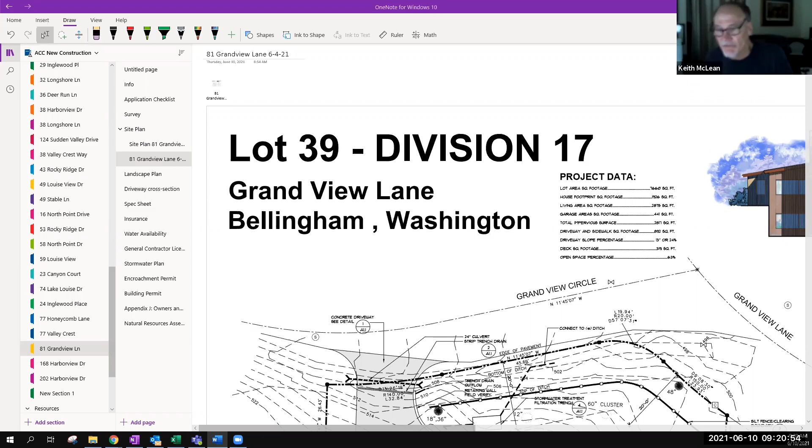Can I have a quick question on that? Joel, why are we showing a 7-foot setback on there instead of our normal 5-foot setback on the plan? Yeah, I don't know. This was a request I made for the builder to show a 5-foot setback to the eave projections. I don't know why they're going 7 feet all the way, providing that, but it's greater than the 5 foot. I'm satisfied with it.

Yeah, with a 1-foot eave, it'd probably actually be 6 foot. It looks like they're going to the corner of the house. There's a hash mark right there for the 1-foot eave, just below the 7 foot. So you can figure out that it meets the requirement—in fact, the 5 foot is to the eave, so they have an extra foot, it looks like. I think we have a similar situation, we're at 7 foot here. Just not used to seeing someone give extra feet. Extra's good.

Part of the reason on this one was the house lays out better into the other corner, away from that corner where there's 7 feet on both sides. So the goal was to get it further into the property that direction, instead of all the way up against the setback line.

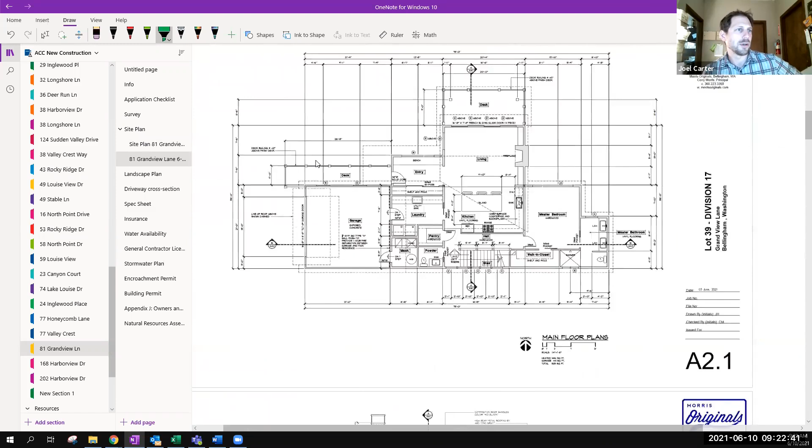No, I don't have any issues with it. Next up, elevations do not specifically show height to finish grade. Yeah, we don't have that. I don't think it was requested to provide a dimension showing our height out. We are well within the height requirements, looking at under definition 2, the 20 feet to the rear of the home. We've got our height of our main floor, but not to our finished grade.

But looking at the height of, where is it, the height of the building? Where do I have it here? I thought we had a dimension. It was measured. Here's what, so our top of our ridge is at, show up here... 539. How'd you do that, Joel? Clean it up from the blurry to where it got real clear there. You just need to zoom in and then give it a few seconds and it should sharpen up. Yeah, I just zoom in and then wait, and it pops into place.

So we're at 530. Quick question, does the maximum height go to the ridge or does that include the chimney enclosure? Our language doesn't say anything about a chimney enclosure, it says top of the roof line. Correct, but which is fine. I believe even with the chimney enclosure, we are there.

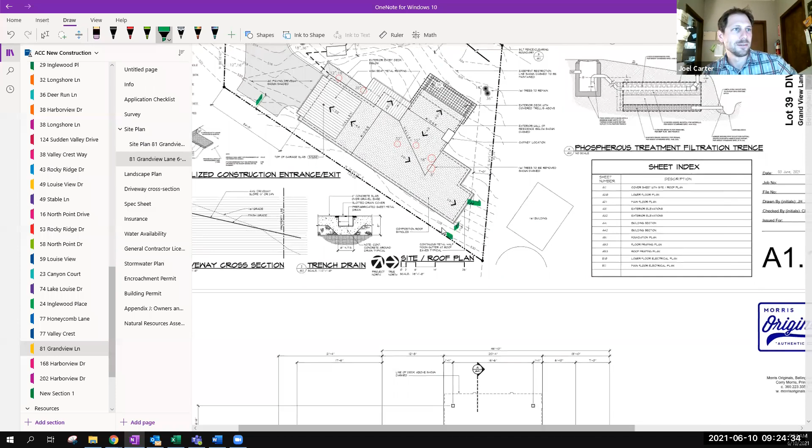If our top of the ridge is 539, and if we're measuring to the back of the property line here to about the 530, you can see we're right there. We're only, what did I say, 529 to 530? Sorry, 539 to 530, we're only, that's a difference of 9 feet.

And this does bring into, so we can also add the chimney, the 4 foot chimney, and we're safe there as well. I think the ridge line's appropriate. The chimney is just a small piece. Yeah, I don't think we've been including chimneys. And we'll make sure we have a spark arrestor up on that chimney. Yeah, for sure.

Okay, what's next? Propane or natural gas? I think we were going to do all electric. Is that correct, Adam? Well, there is natural gas in the road. Getting exact locates is next phase, as we call for locates to get the dirt work started. So exactly where that comes in is not known by Water District 10, that's something we've got to just find out.

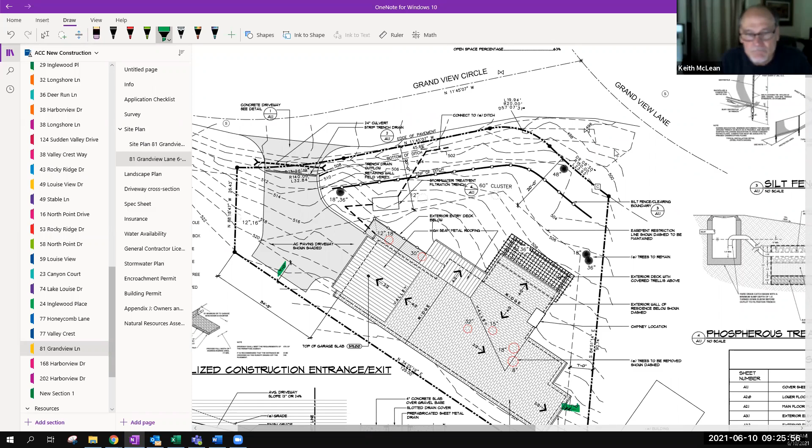Next comment here: maximum of 352 square feet of landscaping allowed. Yep, so we had this conversation after the original landscaping plan was submitted. Here's our most recent updated landscaping plan. These green circles were not labeled as lawn or grass. I think we've got in here now, they made this comment: lawn area not to exceed 350 square feet for the stormwater report. But if the stormwater report says 352, then it should be 352.

I ran that image last night late, so it's probably the one that's there, and I came up with that image showing it closer to 586 square feet. So you might want to adjust that, show the actual size. We had the actual size that came up after their original landscaping plan was submitted, and it hasn't deviated from our site plan view here. So they've put that note in there. Certainly something we'll be checking on our inspections.

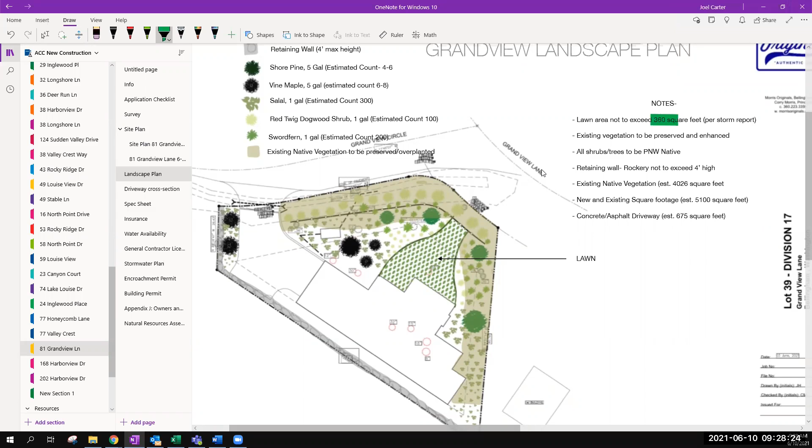All right, landscaping, yeah, square footage.

Next up, are the lighting fixtures capped on top? I believe they were. Yeah, they are. I mean, first off, they would be exterior grade or exterior designed, but I imagine those are capped, yes. That looks cool, I like that.

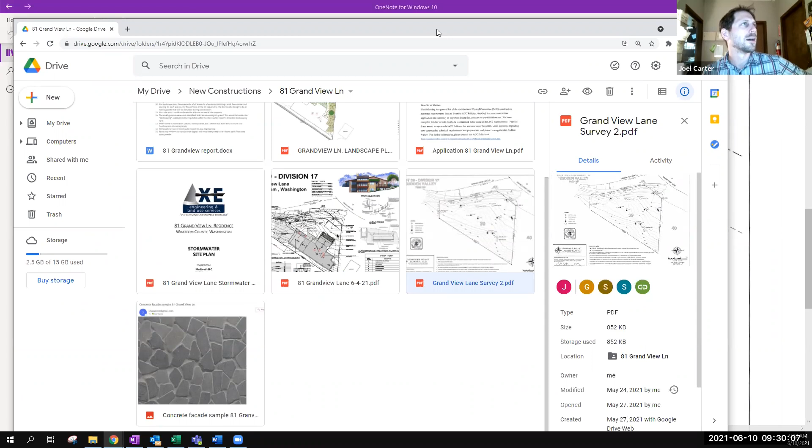And then survey with a question mark. We do have a survey. This is a Bruce question. Bruce, did you have particular concerns? No, I just failed to find it. I see it there now. There were a couple of things I noticed, some incongruencies, a few comments. It says modified May 24th. I don't know why it wasn't showing up for you. Bad eyesight, I guess. Okay, we had to send it back and have tree species put on this survey, which they obliged us.

All right, moving on to Karen's comments. Overall, this was a very good set of plans, in my humble opinion. Thank you for that, well that's a good comment. Thank you.

I have a quick question regarding Grandview Circle. Isn't that actually Swallow Circle? Grandview Lane and Swallow Circle? You're correct. I think the original plat map is probably where they got that from. Yeah, it looks like most of the addresses are still Grandview, even though they're on Swallow Circle, which is really interesting how the numbers work. But yes, you're right. So we're gonna change the address then to Swallow? I guess that's up to the post office. Since it's on a corner, it will be accessed from the Swallow Circle side, so properly it should be a Swallow Circle address, but I don't know that that's our bailiwick. Hey, yeah, Joel, it's a good question.

Yes, I got just a really generic question on this new construction checklist. The date the applicant must have the plan submittal appointment by is 2020 - isn't that kind of last year's? Yeah, we had an older application. I've seen this too, I don't know why. We've had quite a few builders submit the older 2020 version of the application. I think the only thing that has changed, I put them side by side, I didn't see any... I can't remember, there might have only been one minor change. I think it's the date, which now I think is July 31st, 2021. I don't know why, I think this was the application that's been on the website for a while, and it was just recently updated.

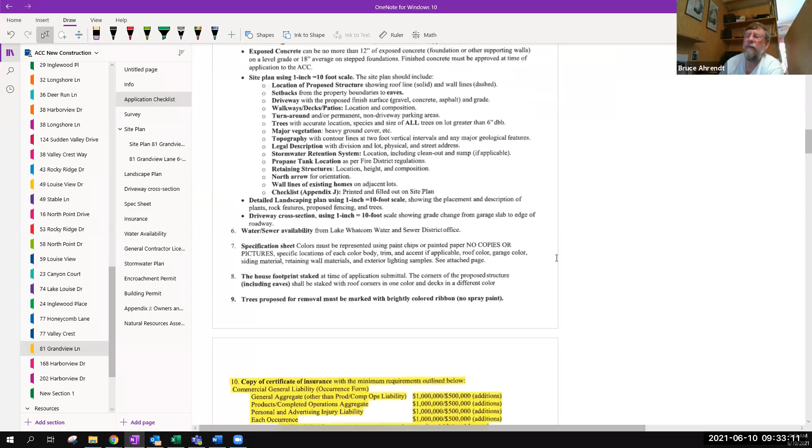Might be smart to update the form and get rid of the year entirely, that'd be great. Yeah, build a time machine and go back in time and build your house. As long as lumber prices are a year ago, that sounds great. Yeah.

All right, next comment: retaining wall called out at the left in the north elevation on sheet A3. I think I know which one this is going to be - A3.1, oh sorry, I'm on the old plans here. North elevation, retaining wall at left. Talking about this retaining wall, this vertical wall here, Karen? Yeah, it's not shown on the site plan. I was looking at this and trying to figure out what this wall was.

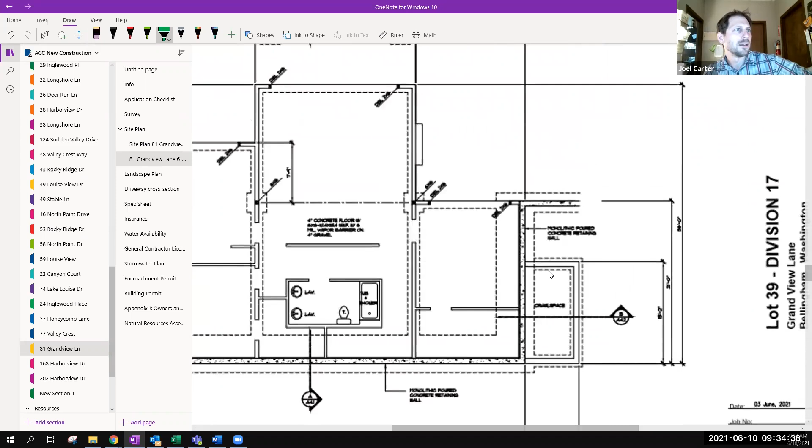Looks like the foundation wall to me, if you go to the foundation plans... it's taking a second to load here. So here's our foundation wall. And then, I looked at this as well, and I was curious about it, how that's going to look. So here's this window, and we have what looks like that retaining wall there. Okay, I don't think that's necessarily a retaining wall sticking out.

There may be some exposed there. It's really hard to tell right now, before digging, where the elevation of that retaining wall is going to happen, and how deep that basement's going to go. It's not that daylight section, it's just going to have to be something revised after the dig to see the height of that wall. I don't imagine it's going to be anything different than what we're seeing on site based on the topography map, but that's a tricky corner to fully predict at the moment.

If it is going to be any retaining walls, they do have a proposed finish for what their retaining wall is going to look like, and I put that in the drive.

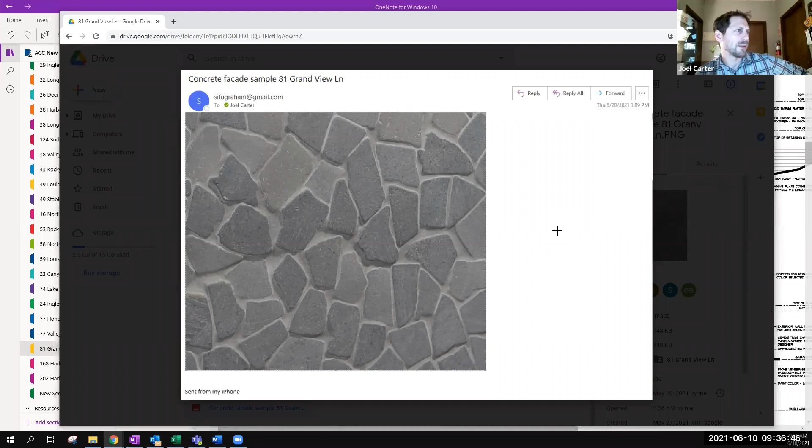We're going to do this concrete, kind of a concrete facade. Are these adhered? Is this just going to be masonry work on the outside of the concrete? I was going to look into what forming options there were for imprinting in the forms. I've got a concrete guy who can do some of that decorative vertical work. So it's going to be pricing out between building the forms that way with the imprint, or applying masonry to the concrete.

So this retaining wall, this area right there, is going to have some kind of backfill and compaction. Looking at the contour lines, it seems like along that face, the existing slope should just be followed. It may even be less extreme than what shows on the elevation - it may turn out more natural than that.

And then siding just kind of goes down to grade, even if it covers some of the taller foundation wall right there. So there may not be much exposed at all.

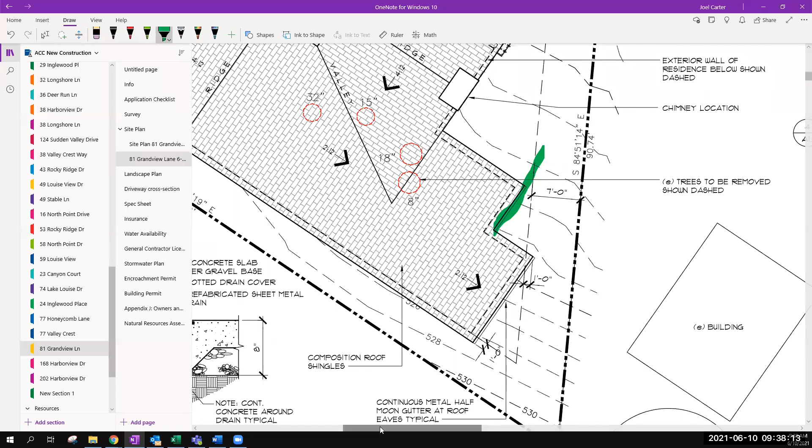I'm thinking it doesn't look that steep there, and if you just followed the grade down - I wish I could point to the corner where the one foot roof dimension is shown, closest to the side property line - that's right around 519, which is what your flat area is going to be in the back. Already the existing contour is 519, so if you just slope it gradually down from there till you get to the 509, I don't think you really need a wall there.

It was a little confusing. We can make an adjustment to the elevation once we have the dig, and I think that'd probably be wise if that's something you guys would require or want. When that adjustment happens, we can revise the elevations to match where we lay out after the dig. That'd be easy to do.

Yeah, to clarify whether there actually is a wall there or not, and we will know that within the next two weeks. That's fine by me. That can be easily handled with an inspection. We'll make sure any concrete retaining wall is covered, and if it is sloping down with the topography, we'll have that either the siding brought down and/or painted.

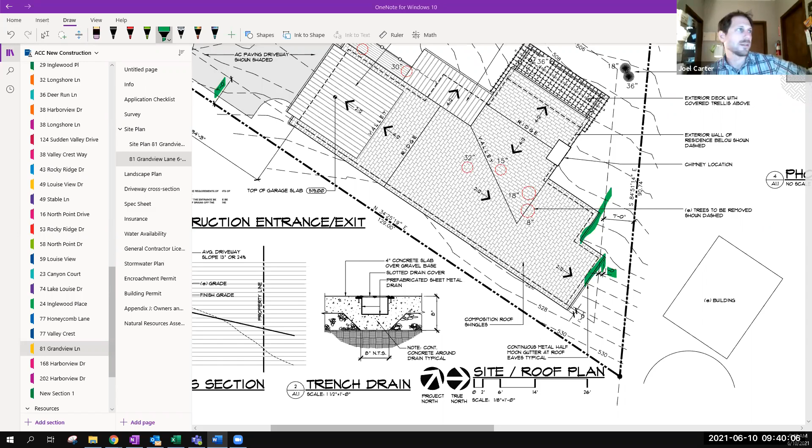All right, next up: are all areas shown with horizontal stripes in the north and west elevations to be finished in horizontal lap siding? I believe so. Are you talking about - oh, right here, this retaining, this area section here. Yeah.

Could you drill in on that a little bit, Joel? I think that might have been - this is your retaining wall. So they're asking, is this going to be lap siding? No, I think what the architect was going for there was like a board form concrete. It's something he's done often, and I've built a number of his houses.

I think, if I'm guessing right with him, that's probably you take old barn wood and create your forms out of that, so it does a release and it looks really cool. But that might not be the appropriate application here - we'd probably just do that rock wall application, that masonry or imprint application that's on the example.

Okay, I remember we talked about that during our meeting - taking heavily textured barnwood, building and creating forms with it to create the texture on the concrete. And we weren't sure if the ACC would be okay with that as a textured surface on the concrete, to meet our exposed concrete rule.

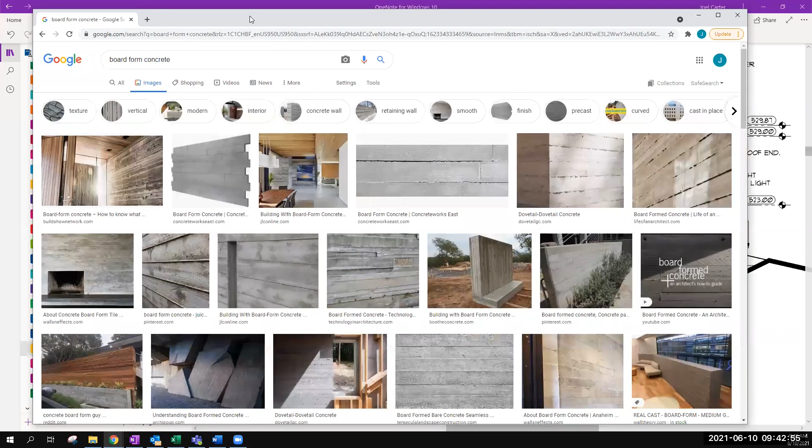How well does that hold up over time? I did one in Fairhaven like 15 years ago, and it still looks brand new. That was a major retaining wall project done with a torn-down barn and deep grooved old wood, and it still looks like old wood stack concrete in that retaining wall.

Some of those images look kind of pale. Do you have an example where it's the brown color, and does that brown coloring hold up? Yeah, the concrete stain, and it could even be an integral color too, is something they add at Cowden. So that should be a lifetime application.

Okay. I do think that if your retaining walls are going to have the stone look, that area would be nicer matching that, but that's just my personal opinion. Yeah, I agree, it can't just be gray looking concrete. It would have to have some unique color, dark, something that made it look more like wood, or stick with the masonry finish.

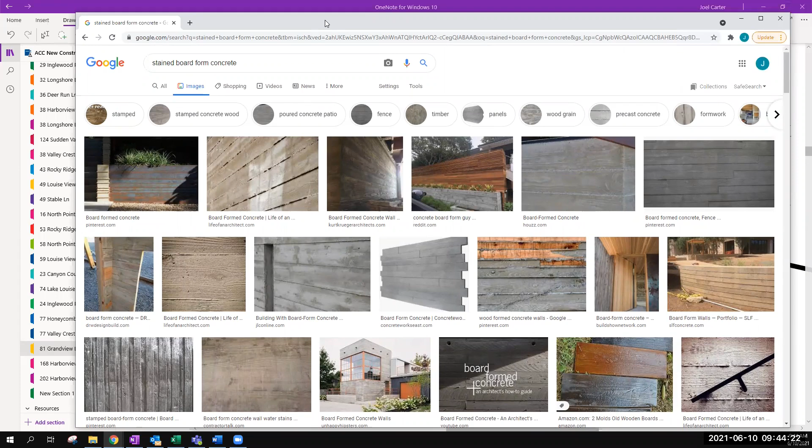I can bring an example before we make that, if Joel, you wouldn't mind making that an inspection point, or I submit it if we decide to go that route, and you guys can make that decision. I don't know how much of that's actually going to end up being exposed. If it's not as much as we think, there's no reason to do anything ultra fancy.

We could probably do whatever's just going to pass, is the best. The images Joel had up there looked rather interesting to me, I thought they probably looked really nice. It would be unique, and it is a very classy look. Again, a very high-end house in Fairhaven, I did a big wall, and it looks fantastic. It is gray, so I could try to find an example where there's an integral brown color, but I think in this location something a little darker than what we're seeing in these photos would be nice.

Sure, Adam, if you can find an example of exactly what you'd like it to look like, we could present that later for approval. It sounds like the stone look probably sounds like it's approved, so if you want to pursue this board form.

Yeah, I would like the coloring to be dark, darker than plain concrete. It's not just a shaping, it's also - you want to have some stain on there, color to it. Yeah, paint maybe. You could dye the concrete in that area. That can be done at Cowden, and there's a lot of different options for a colorant that comes in on the truck instead of being applied to the surface. Sounds great.

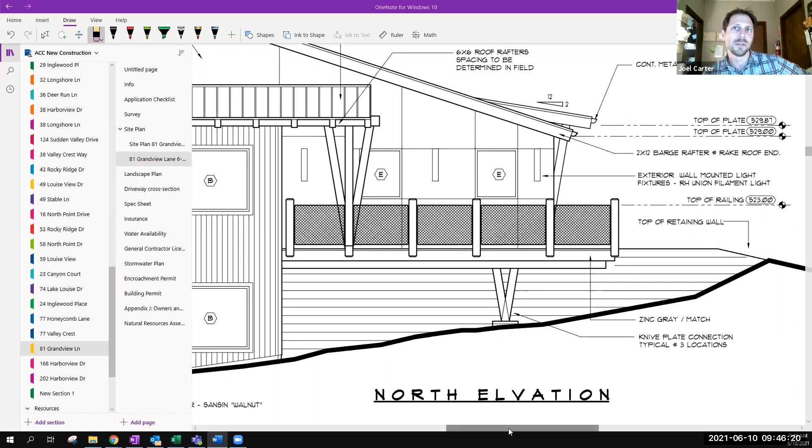All right, next step, I've got that on my notes. Driveway profile should reflect all the requirements in Appendix J, so the transitions shown from the edge of road to pavement to the face of garage. Yeah, this was tricky, we had this similar issue back with 18 Inlet Circle.

Driveway profile should reflect all the requirements in Appendix J, so the transitions with our different degrees, I can bring that up as well. So having these transitions, slope changes.

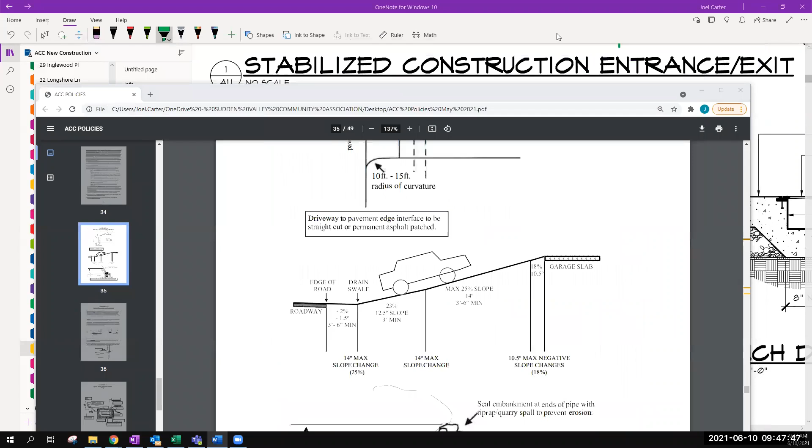Since there is some prescriptive design there, we'll definitely build to suit. I believe we'll be under and not pushing any of the extremes of that requirement. That's the reason we're accessing from Swallow Circle instead of Grandview - it's a gentler, more natural way into the property.

I agree, it's just our practice to show starting at the road pavement edge. There's been a problem with a lot of downsloping driveways dumping water across the street. I have one across the street from me.

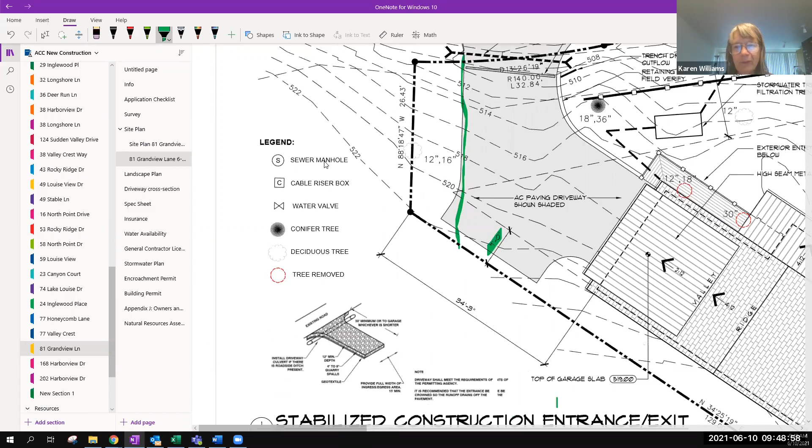In the wintertime, sometimes that water freezes right over the street, and that's not a good thing. So what you're showing here, you have a trench drain. We've been applying that Appendix A - instead of the drain swale where you have to slope down for 3.5 feet, you start sloping up right away at 23% and go 9 feet, if you put a trench drain instead of the swale. So I did a quick look and you're fine - you meet all the requirements. It's just nice to show it, that's all.

Joel, could you send me that Appendix A diagram you had pulled up, that prescriptive one? Yeah, it's at the end of our ACC policies, but I'll send those out for you. Great.

So this next one - a very long retaining wall along the rear property line appears needed. Yeah, this came up too, and I think they've put it on the landscape plan, but it's not yet on the site plan. So we've got our garage back floor elevation at 519, and the existing grade at the rear of the home is up to 530 near the property line. So we've got about an 11-foot transition there, and I think about 6-7 feet of horizontal. So I requested that as well.

They've drawn kind of a rockery here on the landscape plan, but we're waiting for that update on the site plan. I think the scope of that rock work is really contingent on the depth of the dig - just when we hit firmament and get our point for footings, we'll know how high the wall is going to be. Obviously there's going to be something there, but we're not exactly sure the scope of it yet.

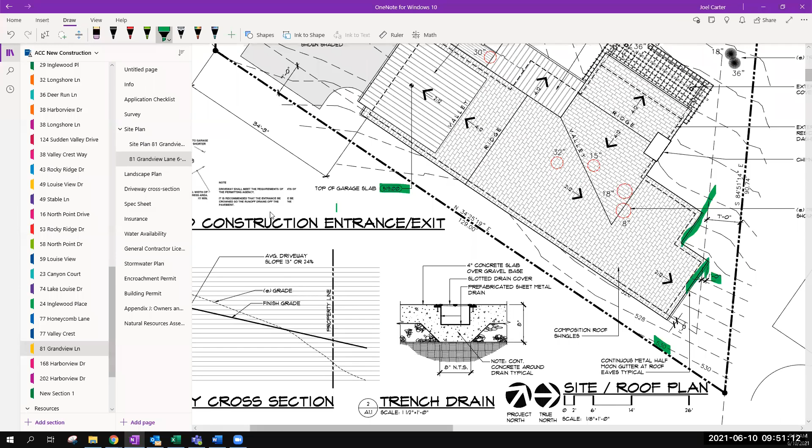I've seen some impressive rockeries around Sudden Valley, certainly - 20, 30 feet high. And then that definitely takes engineering.

Let's see what's next. Oh yeah, so onto the landscaping plan.

Please identify what is to go in the swath in front of the deck, as well as what is to go in the rear setback area, behind the home. Also, we prohibit root disturbance in the drip lines of trees that are to remain.

Yeah, we talked about protecting all the trees with barrier fencing, which means existing trench digging and planting of large items shouldn't really be happening under the tree drip lines. So originally this landscaping plan was submitted with all these plants in here.

300 salal, 100 red twig dogwood shrubs. And I came back with the comment that, hey, really, we don't need to replant the entire lot here - as the policies say, we want to retain as much existing native vegetation as possible. So we don't need a landscaping plan for every piece of the property. So then they came back and marked here's our existing native vegetation to be preserved or overplanted if needed.

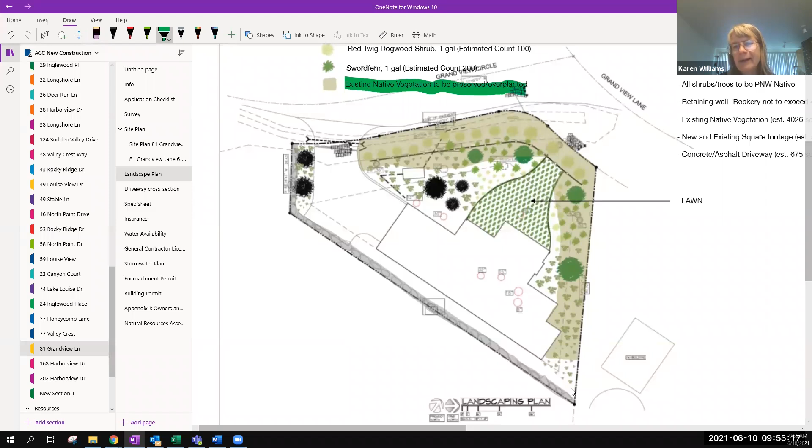Sure, to do some replanting. I think, having learned that we're supposed to help enforce the native planting requirements associated with the stormwater system design, that if you show the 352 square feet of non-native landscaping, put that number on there somewhere, that'll be kind of a reminder. And since all your plants seem to be chosen from the native plant lists, I think we're fine.

To me, the key would be—I'd like to see it, because when they do inspections, they're going to be looking at the lines and stuff as a guide. And I'd like to see that lawn area pulled back to where it's actually within that maximum limitation. So if little edits like that could be done so it's in the file, then when they start looking at it, they don't have to start reinterpreting.

I'm pretty sure I can have that submitted within a week or two. The architect drew that, but those kind of changes—we have the files—probably something Ian and I can just do to shrink that up and meet the requirements, since all the choices have kind of been made. Now we just need to change the dimensions. Yeah, that's just something you need to get to Joel. I don't think we need to see it again since we know what you need to match.

What's the width of the driveway at the south side where you have the extension? Boy, that's a good question. Are you talking about over here, right here, this dimension, to the other side? Is that going to require a waiver? Not that I know of.

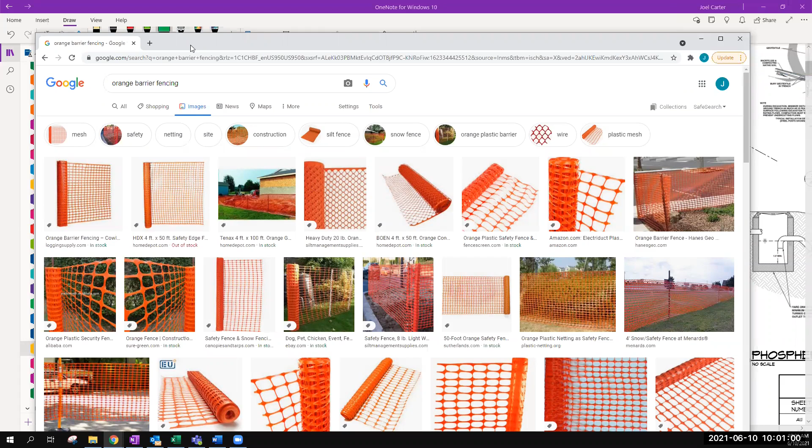So the idea is that we didn't actually specify exactly what it's to consist of. The barrier entry fencing at the tree drip line is what the policies call for, so barrier fencing is not explicitly defined. We've seen some of this orange netting come up, that works, we could stake around it and use the orange netting, fencing, netting.

And we're trying to avoid stockpiling of any materials on the roots, in the root zone, disturbing the closest part of the root zones. And that goes for neighboring trees as well on neighbors' properties, anything in close proximity.

We'll come and check that out when we do our erosion control inspection. That's one of your first inspections before you start your dirt work. After the trees fall, but before you start your dirt work, your silt fencing will be in place and your tree protection is in place.

So we do have our silt fencing, wrapping around here. Would we like to extend that? So the silt fencing location is on the site plan. It doesn't seem consistent with the trees that are going to stay.

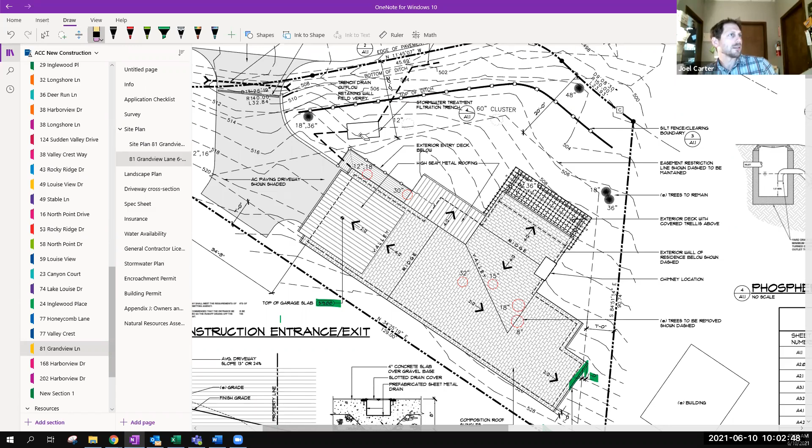This came up too with Adam and I. There's some trees on the first property, behind this lot, property of the firs. I think Adam asked this - hey, we got some trees back here that look like they might need to come down. And I said you have to talk to the firs about that and get their permission. Adam, have you had a chance to talk to them yet, to contact them?

No, I haven't, but I do have contacts over there, so I'll make that happen this week. Maybe I can give them a shout today and get somebody on the phone, either John Epps, the director, or someone who would know who to talk to. I'm sure they have a maintenance guy, and if they need an arborist in there I can get an arborist over there to look at it and work with them. But clearly we're not going to cut anything down that's on somebody else's property. We just want to identify those items that could be at risk, and I'm sure they'll work with us. They have over 1,000 acres of untouched stuff back there, and a couple trees that are dangerous is probably beneficial to both parties.

It's my opinion too that if you present them with an arborist report that says, hey, we've got some hazard trees here, and they recognize the liability of those hazard trees coming down on your house, and you're willing to remove them, then I'm sure they'll at least probably offer to remove them or meet them halfway. That's your negotiation part, but yeah, there were a couple of kind of scary looking trees further up the slope.

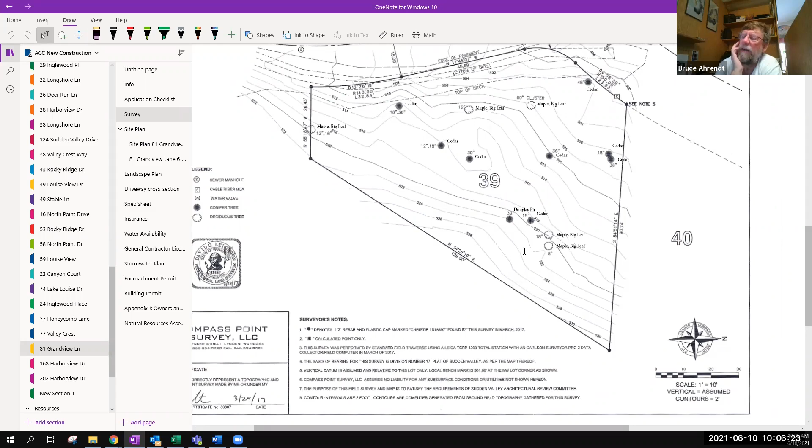Well, we'll get the arborist in there right away. My dirt guy actually partners with an arborist and they work on projects together, so I'll be able to hustle that pretty quickly next week.

Okay, the last point of discussion is the frontage area of this lot is quite steep, has plant cover that seems somewhat sparse in places. It may be adequate to plant the slope with evergreen ground cover such as low Oregon grape or salal. But it may also be good to consider laying back that slope or including a front retaining wall, which will come at the cost of more tree removal and land disturbance.

So it sounds like due to the steepness of the slope, we might consider some additional erosion control measures, some extra planting, which you seem to want to do on your landscaping plan. But this is, I know that our discussion policies encourage leaving as much natural area undisturbed as possible, and certainly digging in the root zones of existing trees is not the best thing.

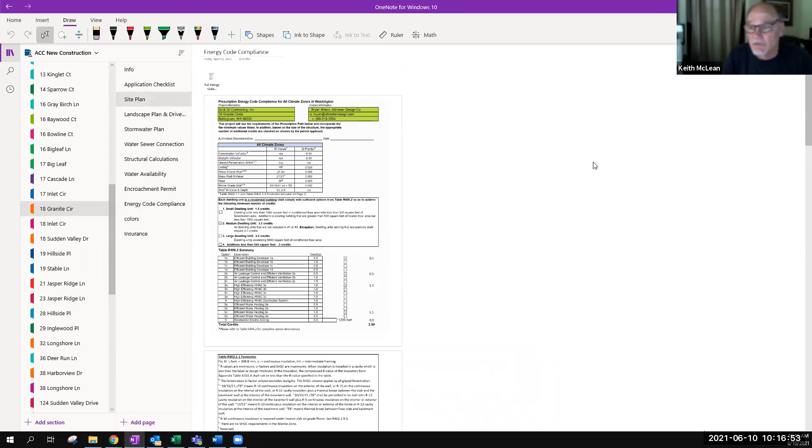I would prefer that, and we had a motion for deferral by Tom. Do we have a second? I'll second. All in favor of deferring? Aye. Aye. Any opposed? Okay, it'll be deferred to next week, John, if you can get on that agenda.

So how do I make that happen? You'll be contacting Joel, making sure he has all the information that was requested in the comments, and then I'll get you on the agenda. Sounds good, all right, thank you for your time, John. You bet.

Okay, we're back to item number 5, 18 Granite Circle. Joel, you got this? Yeah, grabbing it up, here we go. So again, DJ & DJ Contracting, is Connor Ennis here? Yep, I'm here. Let's see those questions, comments. Here we go.

Comment from Bruce: is any of the lot left undisturbed? It's not shown in the landscaping plan, no grass shown. Let's see, I have some version of it. So I think... doesn't look like we have any grass. We've got areas of bark and flowering shrubs, the rest is saying native. Of course, some of it will have to probably be disturbed due to the nature of construction, so I think it would be replanted native. Correct.

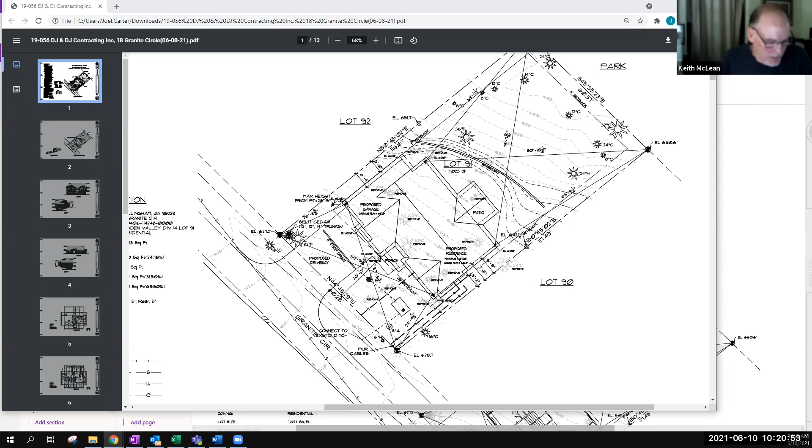I went there late, it was yesterday actually. Oh maybe, yeah. It's also possible that I was at the wrong site, because it was just this string of undeveloped land. On that side of the road there was nothing else to get my bearings. The only thing I identified was your typical sign you put in the front there.

And I thought I had the right site, but is there a large looking fallen tree running up and down the slope next to it? That does sound familiar to me. I'm thinking back.

Okay, yeah, so somebody might have tampered with your work. Yeah, and if I'm remembering correctly, because we have quite a few sites out there, this is on the downsloping side. No, or is that a different one I'm thinking of? The upsloping. Okay.

I can go verify it, and Justin, who was on the call with me last week, our earthworks guy, he'll be out there today. I can have him go double check it and see what's going on. Sure, and I can check it as well.

Hey, let's move on. Yes, hey Joe, can you answer a question for me?

When we're looking at that phosphorus calculation stuff, I know grass falls into that landscaping, but are those higher numbers also associated with the bark and shrubs and flowering plants type stuff, or is that more of a native calculation? Because it just says landscaping on that form.

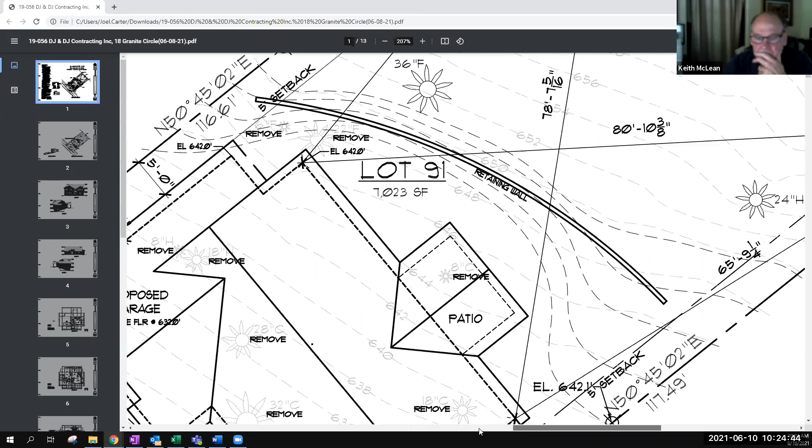Okay, yeah, the Wilson engineering report that started these stormwater systems only said that county staff assign these factors to impervious surfaces, 3 categories: impervious surfaces, native vegetation, and quote landscaping.

What Michael Kirshner said on the phone to me was that they're looking for native plants, native landscape. I personally don't understand how a rhododendron that's native to the Southeast US is functionally different from a native rhododendron, but this is how they're doing things right now, I guess. So I don't know.

For erosion control, if it's a steep slope, it should not be bark, since bark just washes down and clogs up the culverts. We have bark requirements for that. Steep slopes require jute mat or other erosion control, and replanting.

I came up on the final inspection. Let's move on here. Retaining wall samples are missing from the spec sheet. It's missing down in this bottom area, but up here it says the retaining wall materials are going to be concrete, if needed.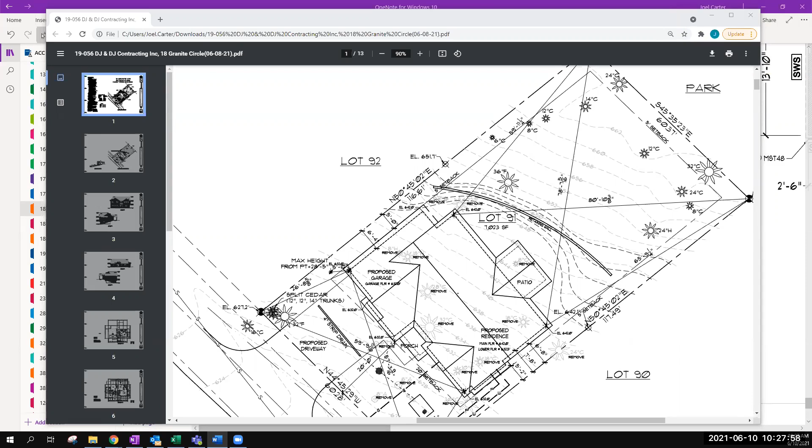And it has no need for a huge foundation, which is good for the trees behind it. Absolutely, and it tapers back as they stack, which is nice. Okay, so that's the plan, landscape block. Next up, asking to show a culvert under the driveway and a strip drain at the bottom.

Real quick, I had a question on the left-hand side there - the retaining wall may need to come down the house a little bit along that side. I don't know what you're planning to do over there slope-wise. It was going to be pretty intense, I thought. Yeah, I saw the same thing.

It looks like the wall shown on the site plan now could be shorter on the right side, but needs to come around more on that side. Yeah, and we're happy to do that. Sometimes after grading in the field, it becomes more logical as to exactly where to end it.

Yeah, you'll probably want to decide yourself after you grade and take a look and see how it turns out. Absolutely, and typically we'd go beyond what would be required just to make sure it's all nice and clean on that edge. I agree with you.

So next up, culvert under the driveway, shown on site plan, strip drain or a swale to go to the ditch. We can have those on an updated plan.

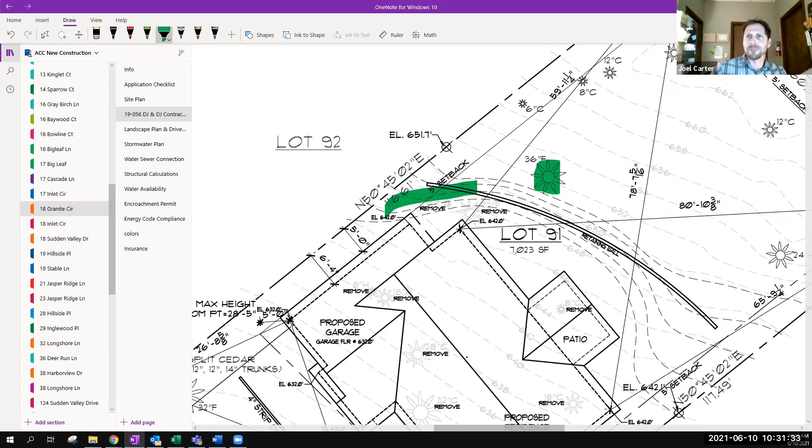All right. And then resolve, oh, go ahead.

Next one, resolving conflicts between root zones and trenching activities in the front yard. Depending on the exact stormwater location, if you're cutting through the roots of these smaller trees, we'd want to remove those rather than create hazard trees.

The power and water placement off to the side will also affect that tree, depending on where they're located. Connor, is my understanding that your designer is putting these power and water lines here as a general template, with the exact location to be determined later? Yes, it's an entry point into the house, a guesstimate of where it meets the road, but once we get that figured out, it might vary slightly.

It looks like this 16-inch cedar is on the neighboring property, so you might need to get permission from that neighbor, or go around it. The owner is Sudden Valley, it's an open space lot, so we'd have to ask Sudden Valley for permission to remove that tree if needed.

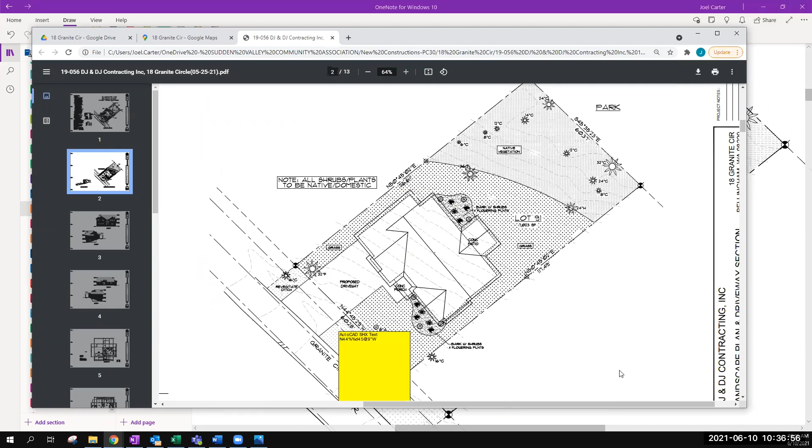These same comments came up in the last meeting, looking at your landscaping plans which looked a lot like this. It looks like you've gone back and made that revision, getting rid of the grass. But the next thing that needs to happen is showing where the replanted native landscape is going to be, and the disturbed area should stay out of the drip lines of the trees that are to remain.

Like that 36-inch fir, if that's to remain, which I think we decided not to, right? But the 24-inch hemlock there, pull the line away from that. I saw it going right through it. Yeah, I think our retaining wall will be far enough away for that 24-inch, and we'll have our drip lines, or the tree fencing, out to the drip line. I think we'll be safe there.

Okay, landscape showing replanted native. All right, couple more.

I think we talked about this one - the slope steeper than 2 to 1 at the left rear corner of the home. Yeah, that's the same thing Keith already pointed out.

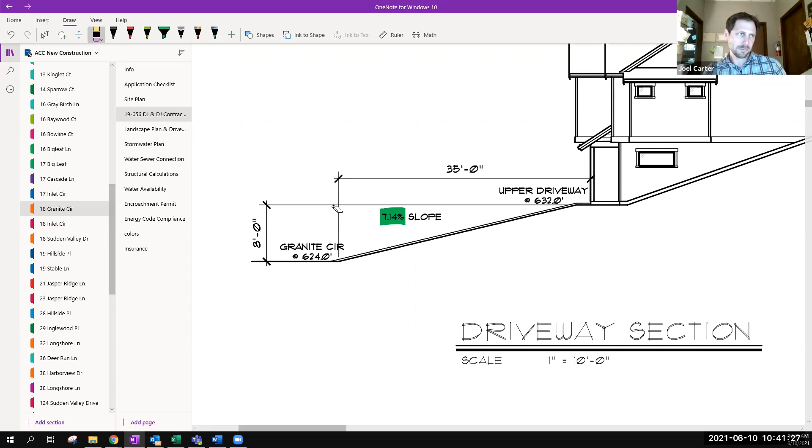If we do have an 8 foot rise over... let's see, an 8 foot rise. They do meet our standard. They can meet our standards with those elevations, the 632 at the front of the driveway - I mean, at the front of the garage.

But the 7% slope, I think, is a little misleading. Yeah, that's right, it doesn't quite compute. Not accurate.

Let me see what I have for... oh yeah, I got 37.5 feet to the face of the garage. Originally I've got the slope measured at 25% when we went over this with the plans.

Let's take a look at this - yeah, 8-foot rise and 35-foot run is already at almost 23%. So that needs to be corrected.

Yeah, that's right, I do have a driveway at 25%. And I had it at, based on taking the ruler to the paper... got that comment in here.

So based on those, if we're at 25%, that is our maximum. But is it 25% between the low point and the garage floor, or is it 25%? Because to me it doesn't look like 35 feet, it looks more like 30 to 31 feet. For this whole dimension here?

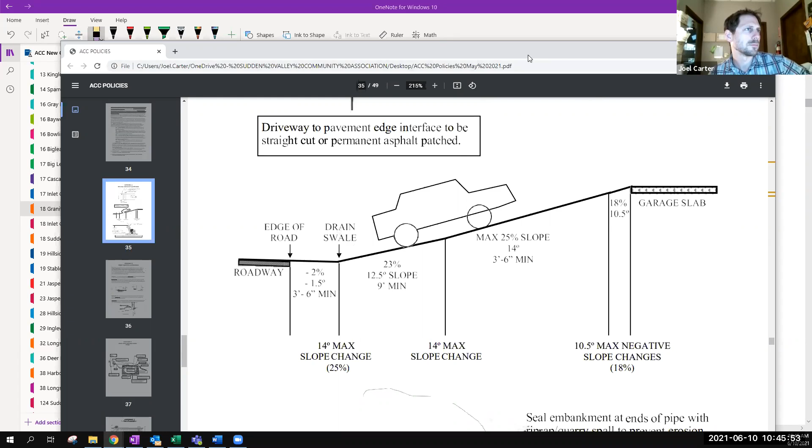All right, so do an updated driveway cross section. Yep, I'll get that right away.

That was the last of the written comments I have. So the big items were: verify the tree ribbons, culvert on the driveway and strip drain, retaining wall on the left side, tree removals and replanting, the landscape plan - it's a minor one with the replanted natives - and the driveway cross section.

So is the driveway going to stay within our 25% guide, or will the max slope have to exceed that? Because if your average is at 25% already, how's that going to be addressed?

I scaled also from the plans to the edge of pavement, which isn't clearly shown here. If it's where their driveway rounding is, then I think they had longer than 35 feet.

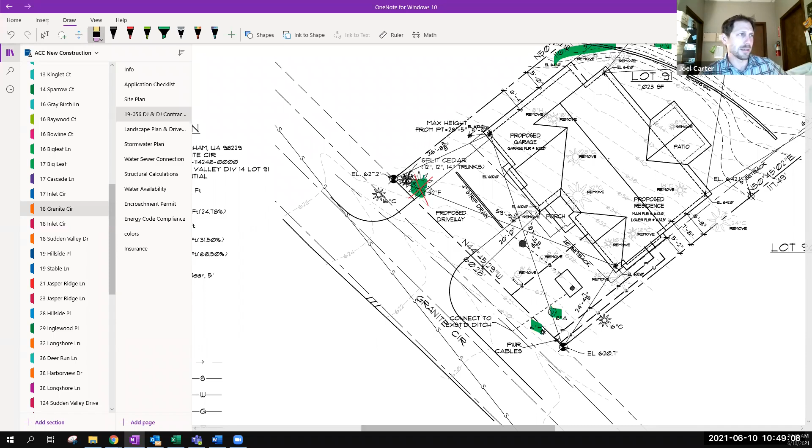So everything else is meeting our height restrictions and setbacks and everything, I believe, right? Let's see, we're at 32.5% property coverage, 54.5% open space. Let's see where our height is - height's 27.9.5 from lowest grade. Yeah, so we're within our height from the lowest grade, 28.5.

I don't have any other - oh, I'm sorry, they also passed the other definition. Sorry, I was looking at the wrong folder there. Yeah, no, they're within the height requirements for both definitions - 24.18% property coverage, 68.5% of open space remaining.

Do we need temporary construction parking, Connor? Let me see here - I think it would be beneficial just to keep things off the narrow road. Yeah, I think on all of our sites I would prefer to have temporary construction parking.

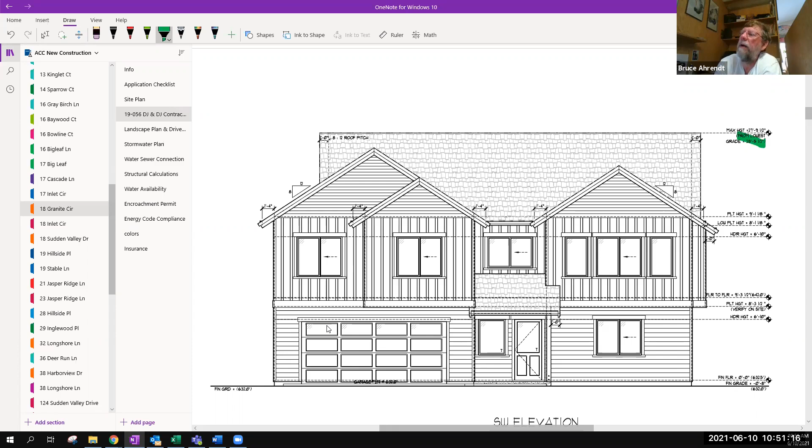That does mean you're probably looking at another cedar removal then, along the ditch? I think we would put the parking here on this low side - you'd stay away from the upper area because we've got the one cedar on the upper near the property line there, I think it's probably in Sudden Valley. There's a lot more space on the lower side, I think it would be easier.

Well, I move to approve the temporary parking on that. Can I get a second? Yeah, I'll second. All in favor of temporary construction parking? Aye. Aye. Unanimous?

Do we have any other issues in the house itself? Just briefly, the width of the driveway - I can't find a dimension on that. We're at about 19 and a half measured. That works. I found a dimension, I just can't read it.

Can I get a motion on the home construction? Move to approve with comments such as redoing the driveway profile. I'll second that. All in favor? Aye. Aye. Unanimous?

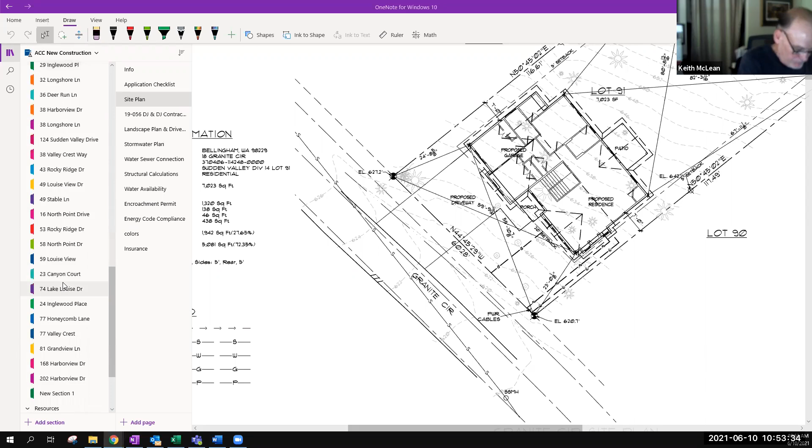Rocky Ridge Drive. All right.

On to the comments. Here we go. No north arrow on your site plan. I believe that, yeah, minor oversight, but I believe north is facing up. Is that correct? Yes, that's a rookie move by the designer. I'm thinking based on my drive-bys and the way Rocky Ridge goes.

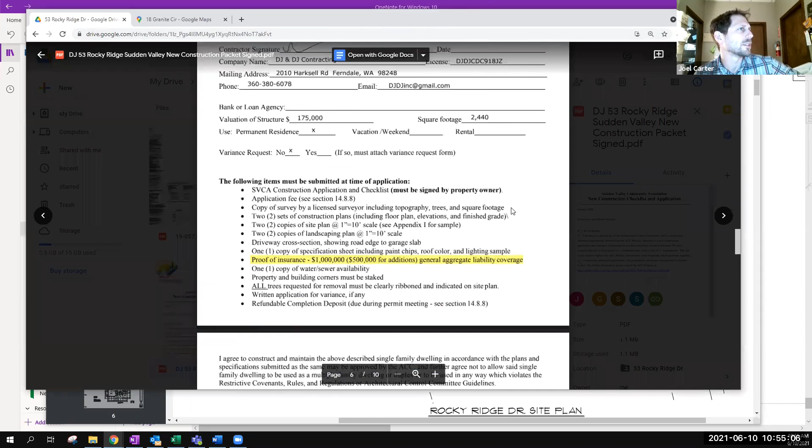All right, has the spec sheet been submitted? Yes, it has. It should be in our Google Drive here. Here we go. Oh yeah, so the spec sheet is part of the application, and so it should be down here at the bottom. Oh, it's not filled out.

Oh, this isn't right. Let me check here because I'm sure I scanned in the correct one. My guess is that as I receive new files, we put them in and then delete the old ones. And maybe I put the new one in and then deleted the old one. Here it is.

Yeah, that's probably what happened. I'll drop it in there. All right, so yeah, there's two. So I delete this one. Here we go.

Sorry about that, folks. So we do have an updated spec sheet now. Retaining wall samples, concrete if needed again.

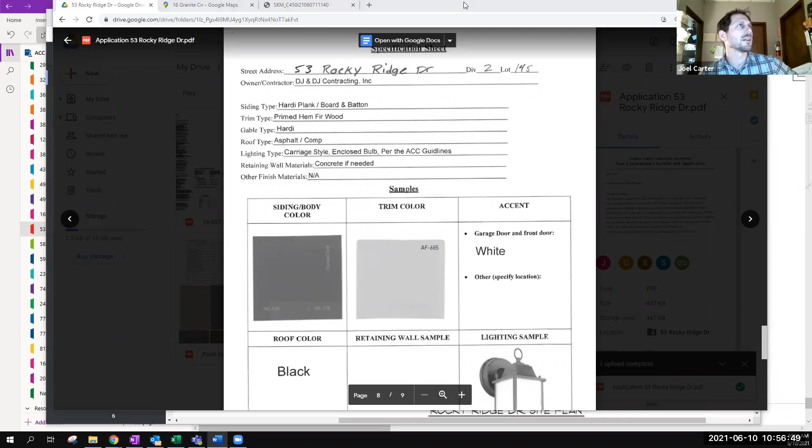This was another one we added in after our meeting. Yeah, similar sloping.

So on those paint colors, I was just noticing the siding has a couple of different finishes. Are they all going to be the same color? Yeah, we're gonna do the body one color with a separate trim, including the fascia and barge board and everything. The siding detail with the same paint color, I think, breaks up the visual nicely.

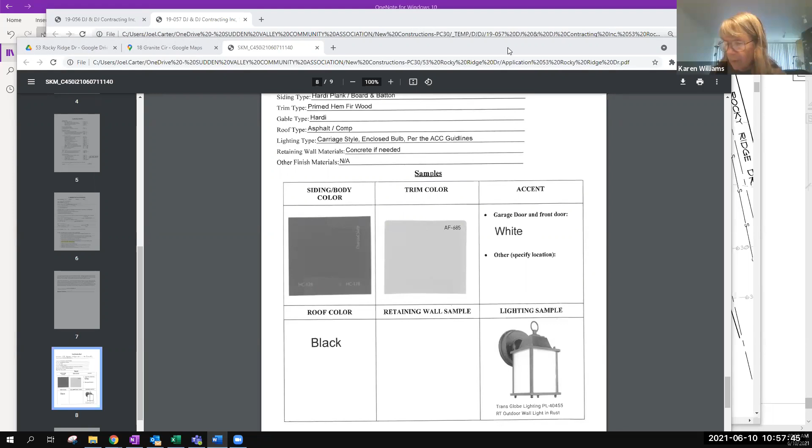So the second story part of the front where it has vertical siding, the board and batten, will be the same color as the horizontal siding. Correct. Okay.

All right, recommend removal of the four large trees closest to the proposed retaining wall. Let me hop over here now. Connor, I'm assuming that retaining wall will be the same retaining wall block you'll be using on the other properties? Correct, that block would be for any of ours.

So we're talking about removal of the 30-inch fir, 30-inch cedar, 30-inch cedar, and the 26-inch maple. Those four. Yeah.

It's always acceptable to start digging and see if you actually encounter roots. It's possible you won't, but to me it looks unlikely that you'll not encounter any major roots. I don't know, we can always have an arborist come out too, when the excavation's been done, take a look, and that's kind of moving forward on these things too.

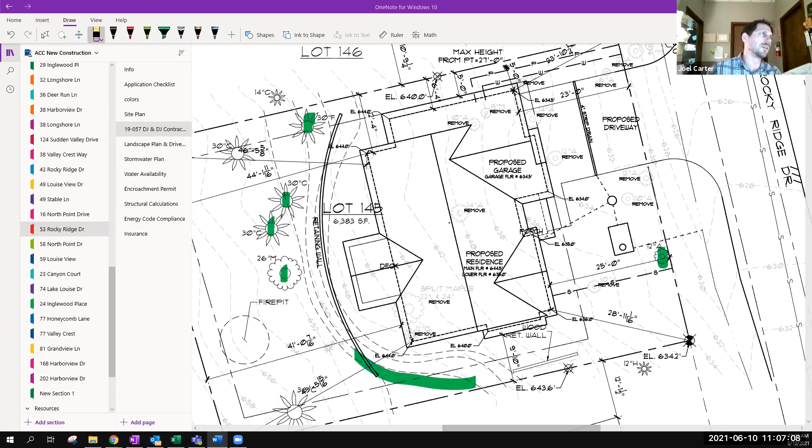Two more comments here: landscape plans should show retention or revegetation, native plants everywhere, similar to our last one. We also had this with the original site plan and landscaping - the original plan had their native vegetation in the clearing limits, they had grass. After our meeting last week, they've gone back to update the landscaping plan, removed that clearing limit, and they're showing native vegetation all around, so more or less the grass is being replaced with replanting.

Similar to 18 Granite Circle, with the landscaping, asking to show where the replanted native is going to be. I can have them go back to the original landscape plan and alter it from grass to replanting native, and then relabel the lines there. But also, a revegetated ditch is better than gravel in the frontage.

No, that will remain. I'm just saying from a visual, we'll go back to the one that showed the grass as far as it illustrated the line in the back, where the break was, and it will then state to revegetate native rather than grass where the dots are. I'm just saying that also shows the gravel in the frontage. Yeah, no, I hear you, we'll keep the revegetation for sure.

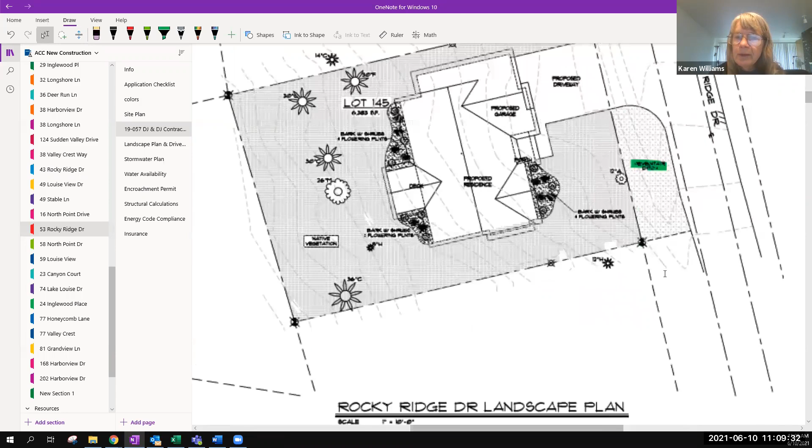But anyway, the other thing, the neighbor's culvert seems to be encroaching a little bit in front of yours, which means it'll be really close to yours. Bruce Bishop was always a big thing, never more than 40 feet of culvert without a clean out. So in between the two culverts, there should be enough room for the crews to clean out the culverts, or they can be connected if they have a catch basin with grate per that policy section that we have.

Okay, we'll get that referenced. Show culvert and strip drain on the drain, right side, or swale on an updated site plan.

All right, those are the comments. So the notes I have so far: removal and replant of the 4 trees at a 1-to-1 ratio, extend the retaining wall on the left side, and show the culvert strip drain on the site plan. We'll keep an eye on our culvert install.

Do we want to approve the temporary parking? I'd prefer it on all of them. I think it fits the slope fine, doesn't it? I'm trying to remember that slope there. I think it would help, going up slope. I think it should fit that ditch pretty well and clean up pretty nicely there, unless I'm remembering it wrong.

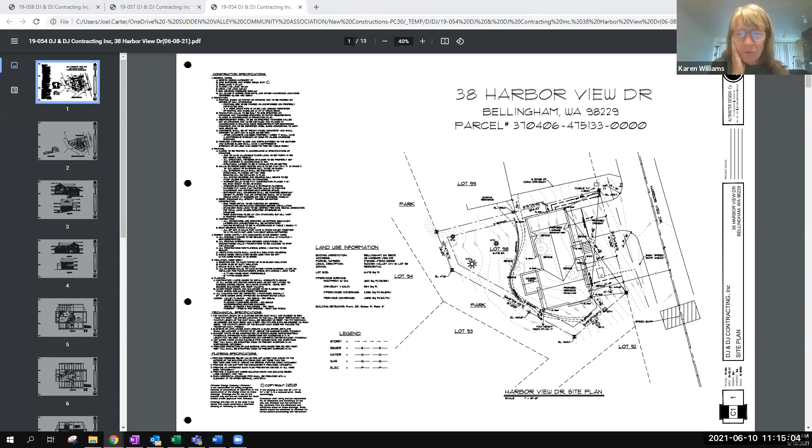Perfect. I just wanted to quickly ask Joel about the one we just finished, 53 Rocky Ridge. I assume that met the lot coverage. That was the smallest, oh no, never mind. The smallest lot is either 53 or 38 Harbor View. They all met the requirements, right? The lot coverage of 35 and 50. Yeah, 53 Rocky Ridge is at 27.3% property coverage with 65.8% of open space. Great.

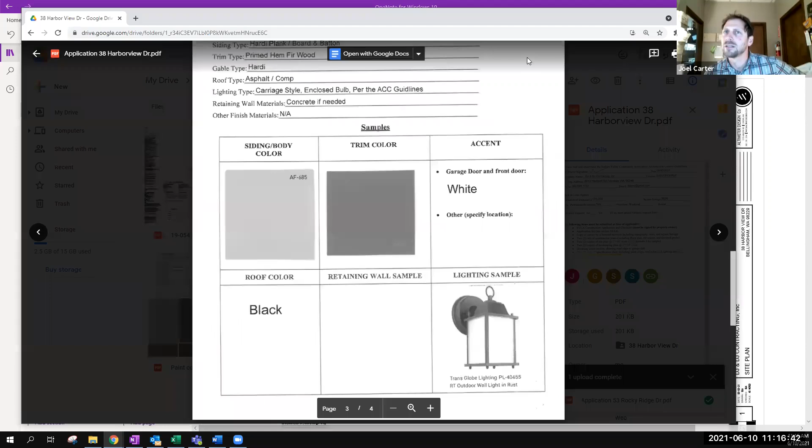Spec sheet not filled out, nor checklist. Let me double check that, I know I have it updated in the Google Drive. This is the one here, modified June 7th. Yeah, originally we had two copies of these applications being submitted - digital copies that did not have paint chips on them, and then the physical copies. We recognized that, got the physical copies scanned in that have those paint chips, so we have these ones here in the office. And this one's an electric only also? Yes, okay.

Any of the lot to be left undisturbed, not shown on the landscaping plan? This is that same topic we've covered - I'll address it all.

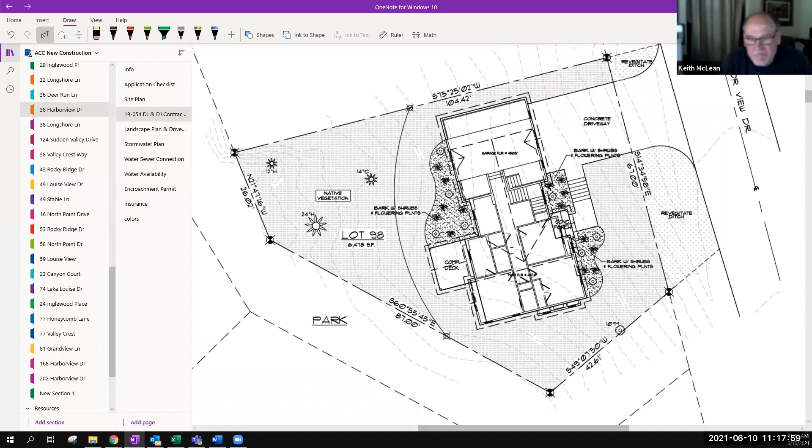All right, what's next? Max height from lowest grade is shorter than max height of building. Yeah, this was something that came up on our initial meeting. I had definition 2 at 21.5 feet, and definition 1 at 33 feet.

Connor, were you able to lower the roof line of this house? Going back through my notes right now, seeing what was discussed on it. It's an 8/12 roof pitch currently. I don't think we've changed anything yet - I'm just looking at the plan now to see.

How far down does it need to be? How far over is it for either definition? For definition 2, 1.5 feet over. Then definition 1 is 3 feet over. So if you could lower it 1.5 feet - yeah, we can do that. You're safe.

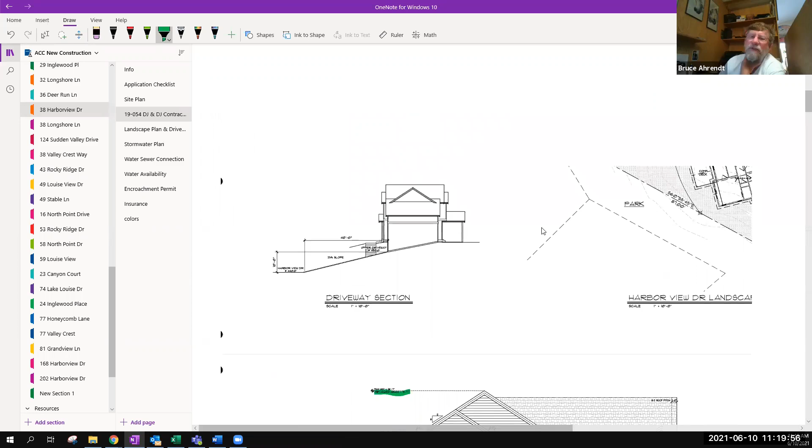This one says your maximum height from highest grade is 19 feet 7 inches, but it also says the max height is 26 feet 7 inches. So what are we reading here? So it's taken into account the...

That must be the slope, either within the property line or to finished grade within 10 feet. It might be easier to label the elevation of the top of the home, so that if we do things like retaining walls that change the grade, the numbers don't start being wrong. Another example I'm showing builders and requesting is that they show a dimension of the height 10 feet back or 5 feet from the house, showing the height.

Well, I guess where I got this was the east elevation. It's labeled max height at 26 feet 7 inches, but then it says from the lowest grade it was 19.7. So if it's lowest grade, that means it's got to be higher. I thought you were looking at that - so it's just a labeling issue. It's correct on the one elevation line, but the wording's flipped on the east elevation. Oh okay, the one below the north elevation, sorry.

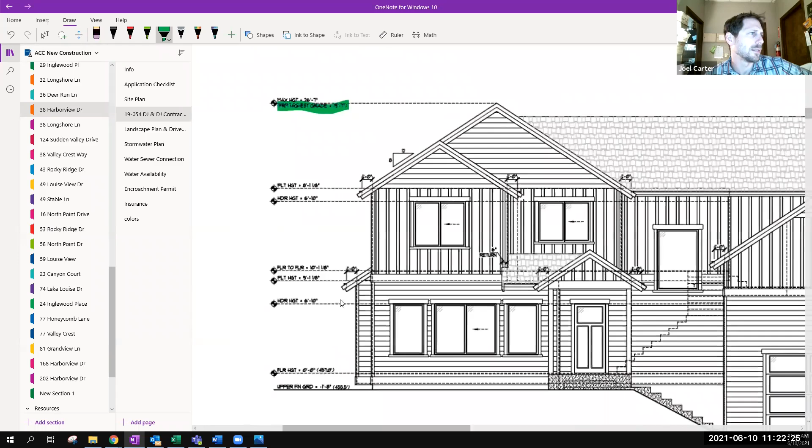So we can go back and double check the height here, and make sure you're within the... let's see, do you have the elevation of your height? So it's measuring this from highest grade 19, and it's saying your upper finished grade is at 455.

But really the finished grade highest at the rear property line, or 10 feet away, is about 460. I read about here 464. You can't go off the lot - it has to be the property line if the property line's closer. Pretty sure.

Maybe I calculated that wrong initially - I might have to go back and revisit that. So what is it at the property line there? The property line we're at about, where I've marked, is about 464. If the height of the house is 26 feet 7 inches above, plus a foot...

Well, you have to get out and measure the house. To really be sure, it's nice to have an elevation label for the top of the house, or a distance from the top of the house to another labeled elevation, like the garage floor elevation. So we can tell how tall the house is intended to be. Then when we make edits to the finished grade, we still know where the top of the house is.

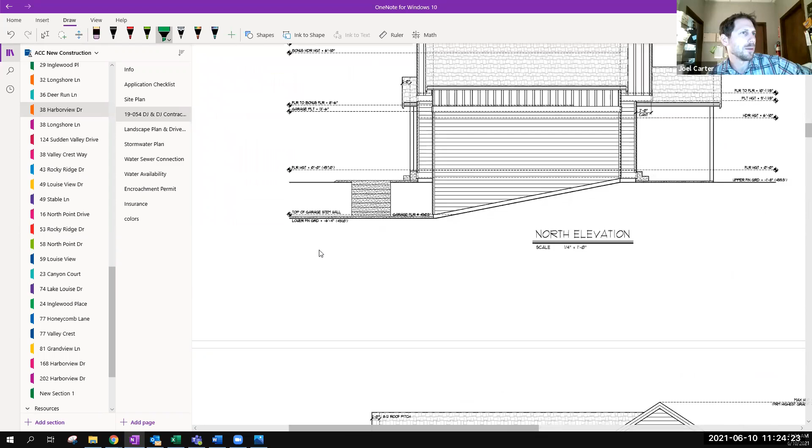We don't have a requirement to have elevations at the top of the house. We do require it at the finished grade at each wall, which they do have. So we have to make those measurements with a ruler, or just do some simple math. So it's good if they show that elevation, or the vertical height to some numerically labeled elevation, so we know, like the garage slab floor or something like that.

Well, they do have listed here, max height from the highest grade is 19 feet 7 inches. But that looks like it's mapping outside of the property line now, which you can't do. If that label is on the site plan, that's where they're measuring to. So, 455.5.

Well, it's something I can revisit in the calculations. We can talk to Connor about it and make sure he's within the limit. If you want to move on and discuss other things, or do you want to solve this right now? It's very important to make sure we are within the limit. That's one of the hard points.

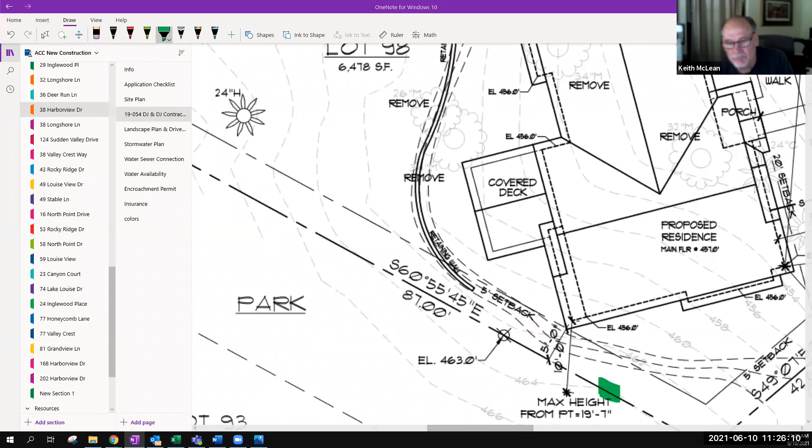Okay, we can solve it right now. All right, so we have to... we can use this property line height of 464. This is our ACC coordinator. We have our upper finish grade of 455.

I think there's enough labeling here, enough redundant labeling, that it'll take a little time to sort it out. Looks like they've got these maximum heights labeled on different elevation views in different places. And to iron out all of that is going to be a bit of a job. And maybe we can't do that on the spot. We're getting a bunch of files. It's just, if they can't get it within the height restriction, it's going to have to come back.

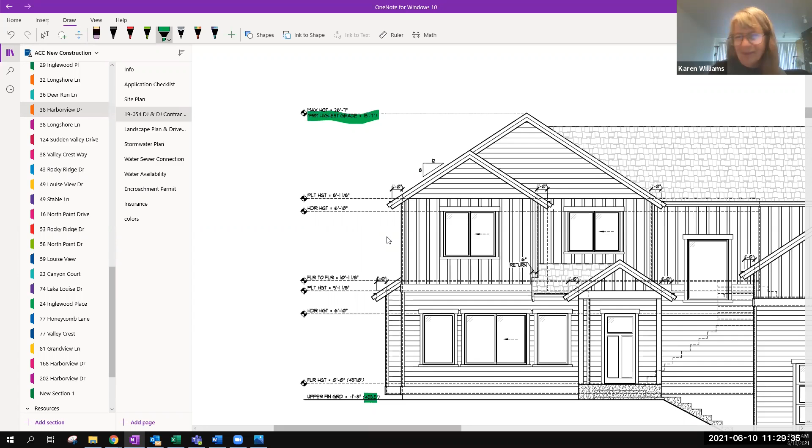It's kind of, it's not really a section, it's kind of a rendering. Yeah, you're right. They're maxed out on driveway. They're overmaxed, I think. They're at 30%.

Yeah, this is where a driveway cross section that matches the appendix would be helpful, because it's just the average slope on that. Again, it's not showing what our max slope is going to be. Sorry, folks, sorry to interrupt. No, you're fine.

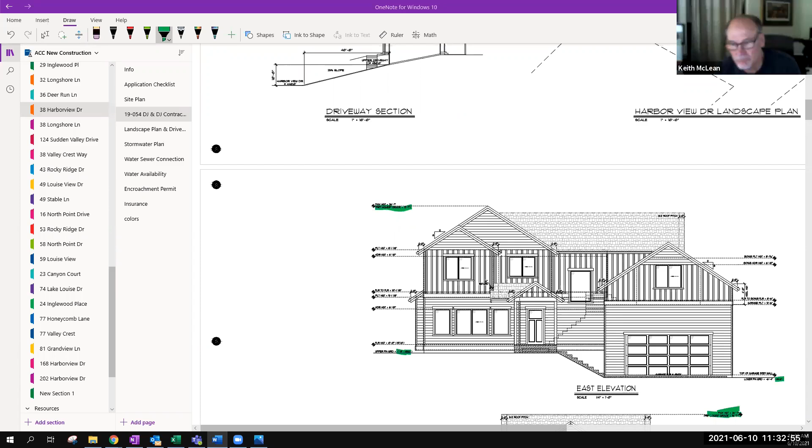Okay, where were we? Driveway at 24%. Yes, I measured it at 25%. That's interesting. Where are we at here on our? I measured it at 30% max. I think we had to add this dimension onto here.

Looks like, is that going to say 25%? There it is. Well, that looks to be the average going the whole length, but if you take into account the leveling at the ends a little bit, based on the appendix, what's our max slope going to be?

Well, this part is Harbor View Drive, this section of the road. So from the setback of the house to the property line, that's 40 feet. That is going to the edge of their pavement.

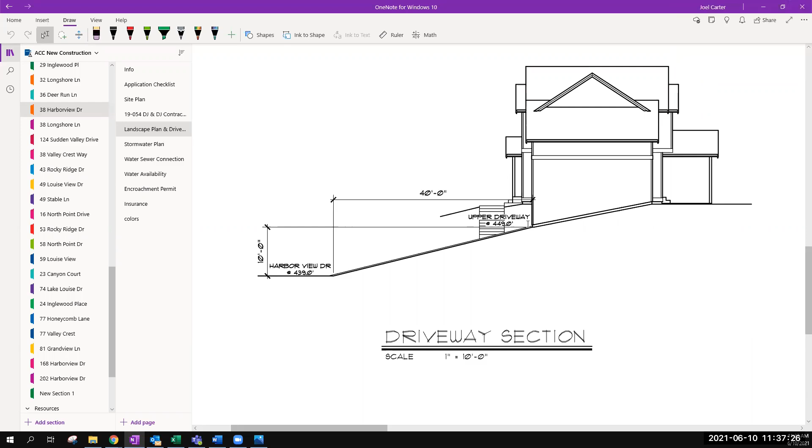Okay. Maybe the garage floor is sloped so he can get in there without high-centering his little cars.

Sorry. All right, so Connor's going to address the driveway. Okay, couple of comments. Neighbor to the north, multiple incursions on this lot. Yeah, that's going to be friendly neighborhood stuff here. Where's our... always fun.

The area seems to be an old disease pocket. Most trees that are said to be retained are dying or are hazard trees and should be removed and replanted. No hemlock should be replanted in this area.

Let me guess, that's Bruce. Yeah, the disease pocket even extends beyond there. If you look, there's a lot of dead hemlock and stuff around in the area. That thing has died back and grown back to hardwoods, which is normal for a disease pocket.

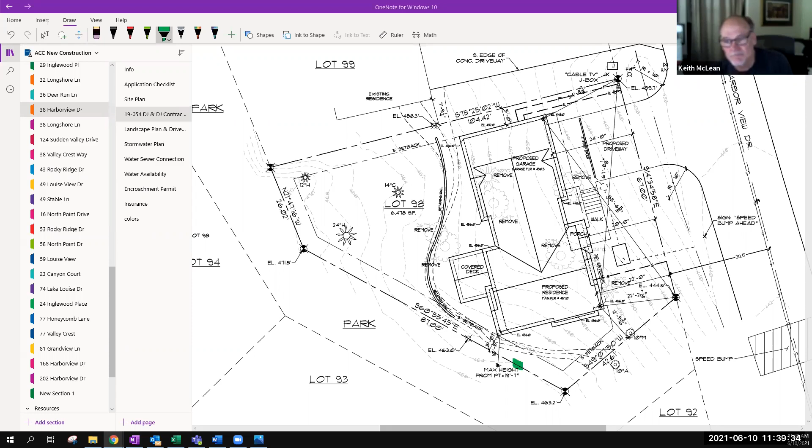And the only one I didn't specifically look at was that one 14-inch cedar in the middle there. That's the only one I specifically didn't check. Okay.

Do we want to remove that cedar and request replanting? I'd say if you want to keep that one cedar you marked, great, and remove everything else. Keep this cedar only because I didn't look at it, but that one up there is undercut majorly and that's dying. And that's the one the neighbors have a security camera drilled into the tree.

That lower 24-inch hemlock is definitely dying and a hazard tree. And there is some other cedar along the property line, not marked there, that's on them and growing on nurse logs and stuff that are going to fall toward the house to the left. So those need to be removed.

Do you think they're in Sudden Valley? I didn't specifically look at that one cedar you circled in the middle, the 14-inch. That might be the only one that could stay.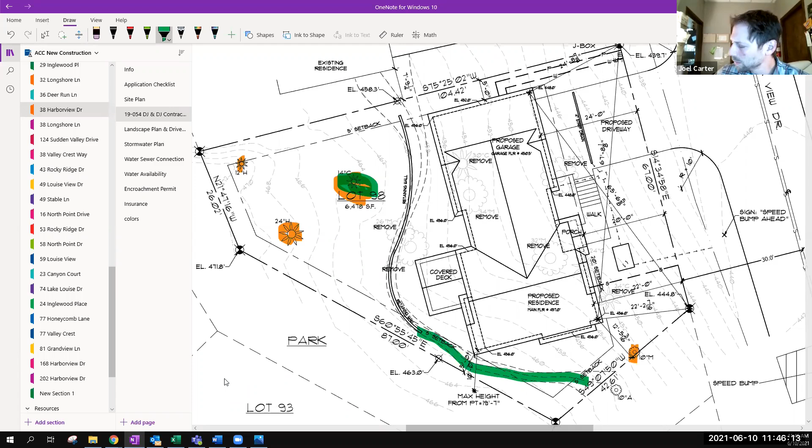All right, and then similar comments - culvert on our driveway, strip drain. Same comments about the landscaping plan. Skipping around here a little bit. We'll verify those. And then calculations for driveways show a variance will probably be needed for steepness, approximately 30% slope after transition areas are accounted for.

So let's see what you got. Oh, we talked about driveway steepness already. And then for the finished grade at the rear left corner of the home to be 45.5, retaining wall must extend - okay, we did that one. Okay, those are the comments. So far I have driveway steepness. We need to figure that out.

What's your solution on that as far as how are we going to solve the driveway problem? Lower the house. Yeah, that's not our solution to make. We can lower the house, or lower the garage at least. So my notes right now: the driveway steepness is an issue, remove trees and replant to a 1-to-1, clear all the dead trees, and then similar comments - culvert and strip drain, continue the retaining wall, and landscape plan updates.

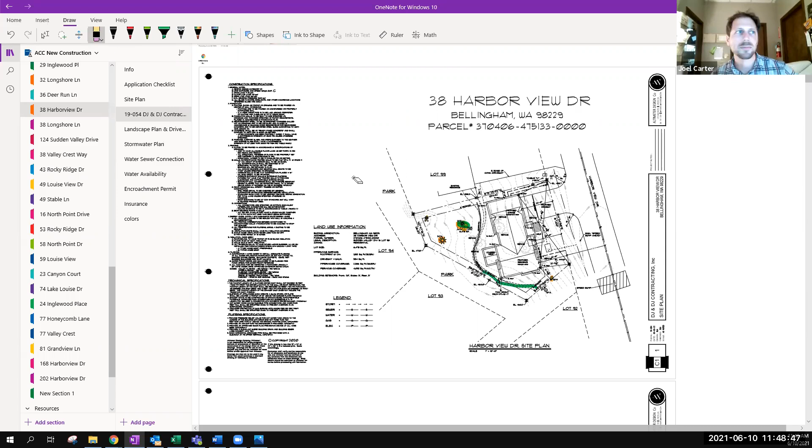Other things, let's see. We're at 28.3% of property coverage. We have 63.2% of open space.

Setbacks are all good.

Seems like the driveway is going to be the biggest issue here. Did we discuss whether there's a strip drain at the end of the driveway before it meets the road? I have that in my notes to add. Yeah, I didn't see it, along with the culvert.

So I figured what I thought their top of driveway elevation would be if it was 25%, or 48.8-ish. So that's only a foot, a foot and a little bit. Well, your garage slab should be lower than 450.5. 449 would be perfect.

We want to make a motion on this new construction. I kind of think we have to defer until they get the driveway figured out. Anyone want a second deferral? I'll second. All in favor of deferring? Aye. Aye. It's unanimous.

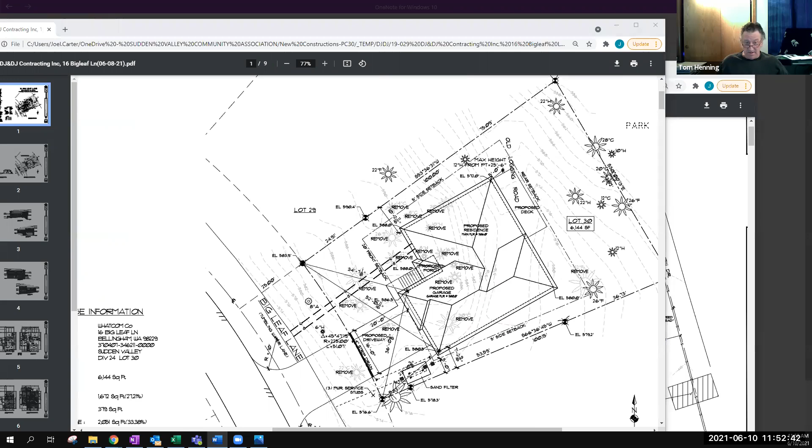It'd be nice. Also, I thought one of the plastic markers in the back had been relocated. Like it didn't make any sense where they had it. I didn't find a pin there, but it was way too close to the other one. We can go back and verify that.

We did receive a concerned call from the neighbor talking about tree removal stuff. So we can follow up on that.

Maybe it was tampered with and moved. Is it this rear one? The one at the top of the page - they can't do that. It looked like it was halfway down, like it was too close to the other one in the back. I'm sure they didn't move the rebar, but I was like, that doesn't make any sense. This one up here. Yeah, okay.

So that would have been the other neighbor than the one I think is probably upset about the tree. I ran into the neighbor at 18 when I was there. She came out and wanted to know what I was doing.

Yeah, Connor has got some neighbors to meet, a couple of them. And we'll talk to the neighbors too. I have a voicemail from one of them. We'll address their concerns to help you out, Connor. Appreciate it.

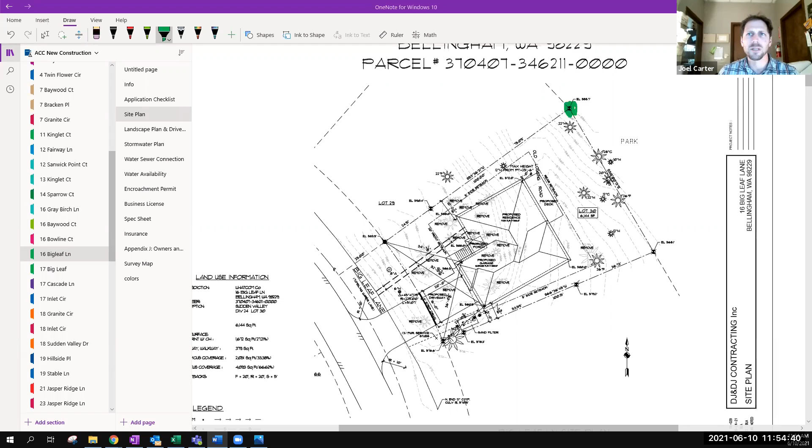All right, so similar comments on the landscaping plans, putting tree protection. Connor is well aware of that. We've got - so let's see - preventing creation of hazard trees.

So I want to talk about this one, guys, because I have a very upset neighbor located next to this home that SVCA is now going to have to deal with. He is really upset about a tree coming out. I don't know if any of you have spoken to him. Which address? I believe he is at 17. His name is Nissan. 17? That would be across the street?

I'm not sure what his address is. His name is Nissan. Have you guys spoken to the neighbors? When I was there, a woman at 18, which is the one down the page here on the left, on the right of the lot. The woman there didn't say what her name was, but she challenged what I'm doing there.

That was 18 Big Leaf, that's Nissan's place. Yeah, he's very, very upset. So we need to be careful when we go out on these site visits, what we say to these people, and that they understand who you are, because a lot of the time they don't seem to understand who you are. So we have visitor badges now, and we do need you guys to wear those when you're out, okay?

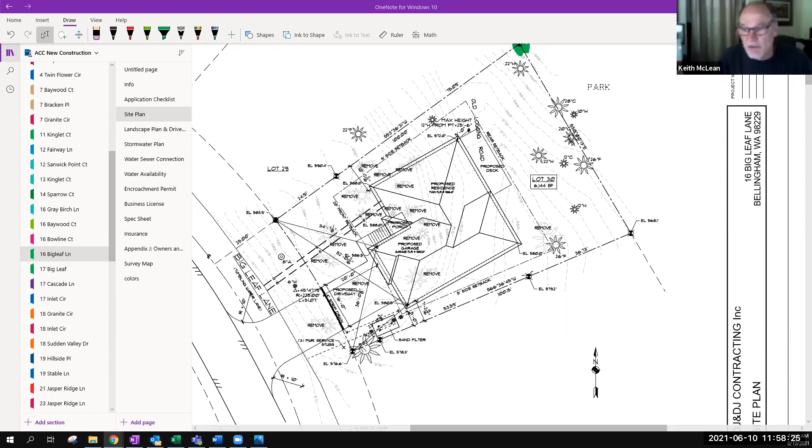I forgot what the foundation elevation is. I have to look at it. You want to make a motion for an arborist report?

I don't know that that will solve it. We can say leave the tree, fence it off. In the end, if he demands he wants it to be left, we can get him to sign something saying that he does not want it removed and then it becomes his liability. But that's really the best we can offer him. Yeah, that's about the best. I don't know, maybe try to go around it.

So wouldn't we think the driveway excavation would harm the roots? I wouldn't think they'd be that close to the surface on a tree that size. My recommendation would be that Connor or DJ would want to get an arborist report. And if the homeowner next door decides he wants a tree left, regardless of an arborist report, then he signs something. That way they're covered, and the arborist said it was going to be damaged or could be. So that's just my recommendation.

But then if it's not removed and the tree falls on the new house, is it then his liability as well? It would actually be his insurance that would have to cover it because the tree would be falling from his property. He would sign off saying that he has accepted the damage to the tree and he's accepting responsibility for it, based on the arborist report.

If a tree falls, the owner is not automatically responsible, but if they were negligent because the tree was dangerous and then it falls, then they are responsible legally. And that information will come on the arborist report that says this is a dangerous tree, has been damaged, recommend removal, and then at that point, he's aware of it.

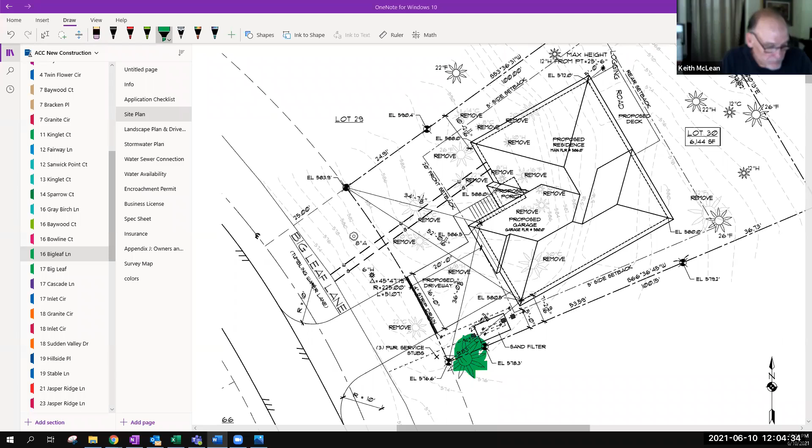Real quick, Joel, Susie, are you guys running with the communication with that neighbor and figuring out the best solution? I am currently trying to communicate with him, we'll see how it goes. I queued Joel in on it this morning, sent him a voicemail from the guy, so we'll be working on that today. I'll let you know how it pans out. Hopefully we can just get him to understand. Yeah, I appreciate it, if you guys run point and let me know if you need anything from me.

Sure, we'll deal with the neighbors best we can. I'm still thinking we should make a good faith effort to protect the tree and not run something deliberately through that we know is going to wipe it out, such as the electrical lines and the stormwater. So if we can't come up with an early agreement on that, I think we should really be looking at trying to get that stuff moved. Yeah, I agree, a good faith effort is always good.

So stormwater relocate attempt first, arborist report, yeah either way, yes, okay.

All right, then the last comment, show drainage swale in the driveway, or strip drain, so it's the driveway. And finally, the last strip drain comment here. Whose comment was that? I think this was yours, Karen. Please show a drainage swale in the driveway profile per appendix A. Consider lengthening the swale to avoid potentially trapping water in the shallow ditch along the frontage.

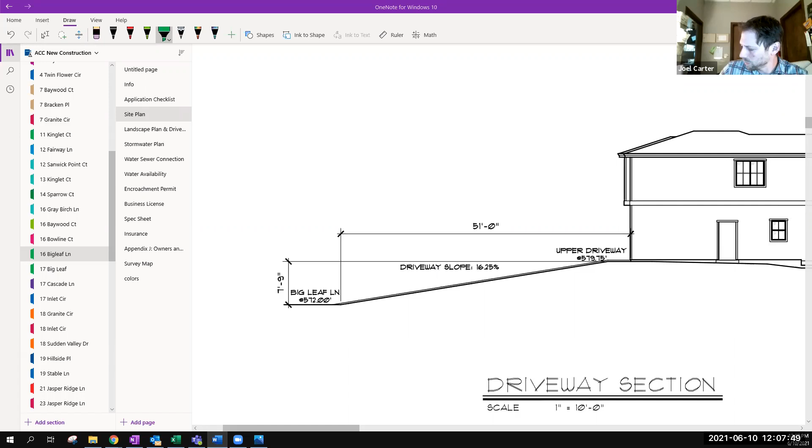Okay, I've got that in my notes, driveway swale. Is that something that can be determined in the field, and we go with a strip drain or swale based on best application? I don't think you need a strip drain. It's a question of how wide the swale is.

Well, if you do the standard 3.5-foot swale, then the lowest point here is 15 feet away from the pavement. So if you only go down 3.5 feet and then start going up, there's not room to put a culvert underneath your driveway there.

That ditch is really, really shallow. So you can't really put a culvert under your driveway there. So instead, what you can do is either try to regrade that so the lowest point is closer to the road, so it lines up with where the bottom of your swale is.

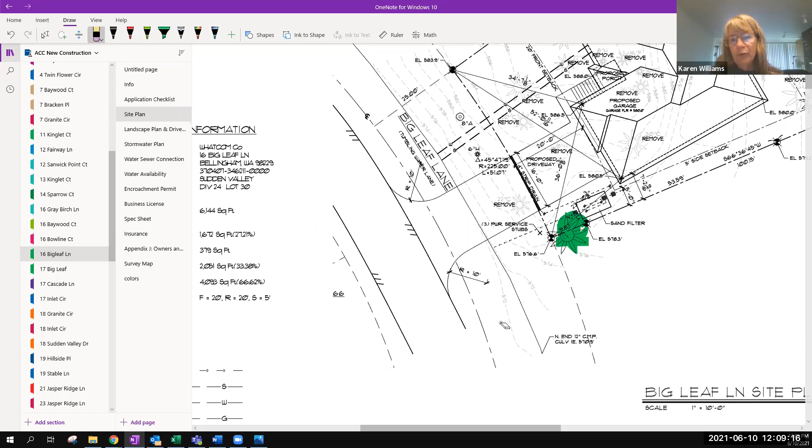Or something. I don't know how much water ever accumulates there. I don't live there, I don't know. We can always hose test it too, to make sure water's running off that. We would just want to make sure water does not run onto the roadway - that's the goal of the swales and strip drains. But for the owner to have a little swamp in front of them is also not so pleasant.

So we can evaluate that ditch on whether or not a culvert is needed. Sounds like a culvert probably won't be required. I don't know, they'd have to... is that what I'm hearing? It was 2 inches high and 6 feet wide. I don't know. Okay, we'll follow up on that too.

Is this all stuff that we would address in the field? I'm guessing once we have a visual on it and see what we can do. Yeah, make sure you at least put in a swale. At minimum, swale and culvert to verify in the field.

Okay, and the last comment. I believe you cannot raise the grade at the left rear corner of the home to either 584.75 as shown in the north elevation, or 583 as shown in the east elevation, without creating slopes steeper than 2:1.

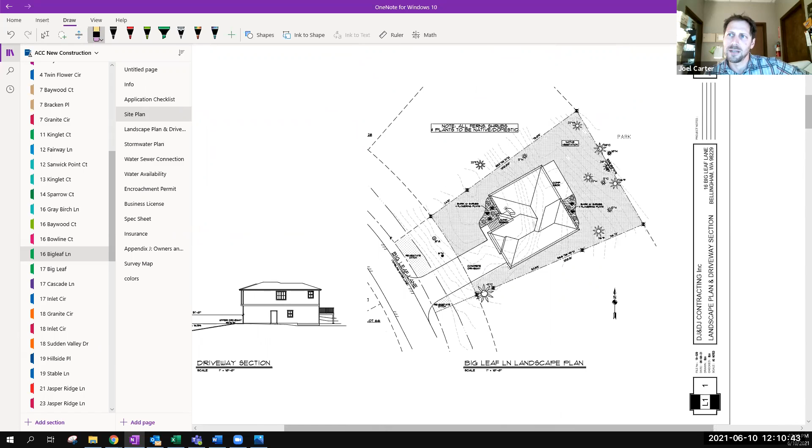Only about 15 feet away toward the left, it will be necessary to meet existing grade of 570. Here, I'll put the comment up here. The same 570 contour line is about the same distance toward the rear property line, and it's part of a steep downslope there.

So we're talking about the north elevation, really - the north elevation in the rear left corner of the home here, 584.

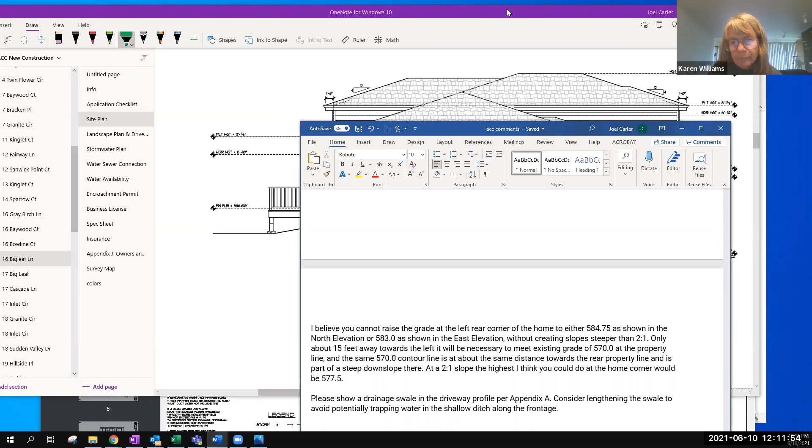Yeah, those two should match. So this finish grade on the north elevation and this one do not match. East elevation would be the next sheet, I think. Sorry. East here.

Other side, I think. Wait a minute, the rear, wherever that is. So it's looking at this, the right rear corner. Oh yeah, you were right. I think you were right.

So we've got it marked as 584 on this one, and then over here it's something different, 583. Yeah, so there's a foot bit of a difference there. Let's see.

Well, if we are creating slopes that are 2 to 1 or greater, they will require some jute matting and replanting. That's in our policies.